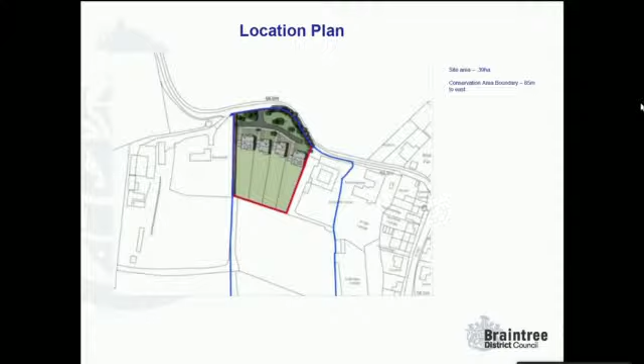This is a safeguarding map which shows the settlement boundary for Great Bardfield in the adopted local plan, and again in the Section 2 local plan, and you will see that the site is unallocated for development in either the adopted local plan or the Section 2 plan.

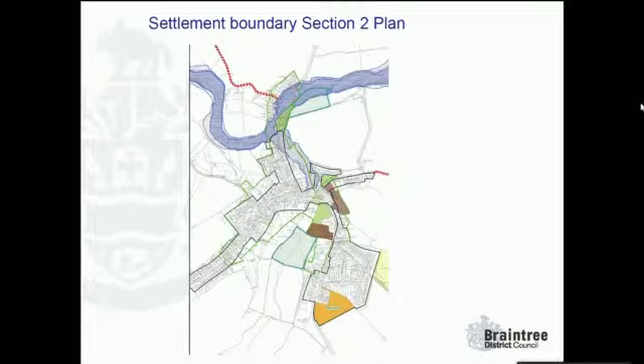This is a site plan showing that it's proposed to site approximately 4 large detached houses set back around 11 metres from the back of the highway, with the access approximately 21 metres to the east of Brooklands.

The dwellings would be set back about 11 to 16 metres from the highway, and the land is in an elevated position at least 1 metre above the extent of the highway. Also, as said by the parish council representative, there is a slope in the site from west to east, going down across the site.

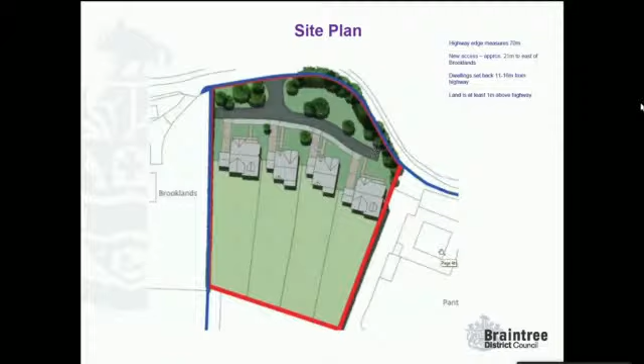These are illustrative house types giving an indication to us. Although these are not up for consideration, they show us that quite large detached two-storey houses are proposed in this location.

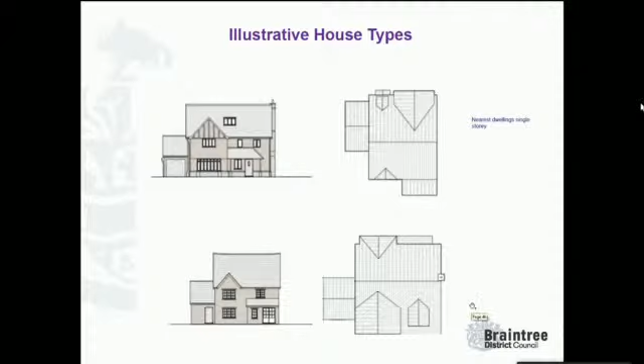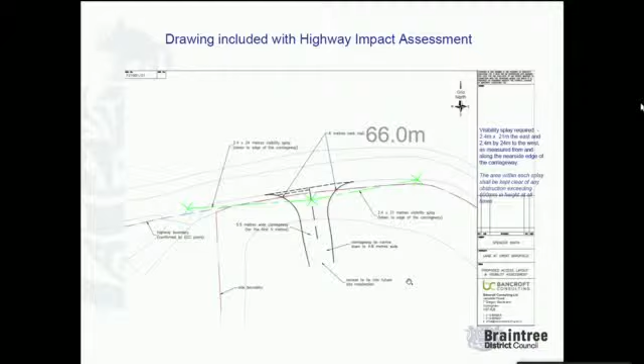This is a drawing that was included with the Highway Impact Assessment, which has been viewed by Essex County Council Highways, and no objection has been raised to the proposal in terms of highway safety.

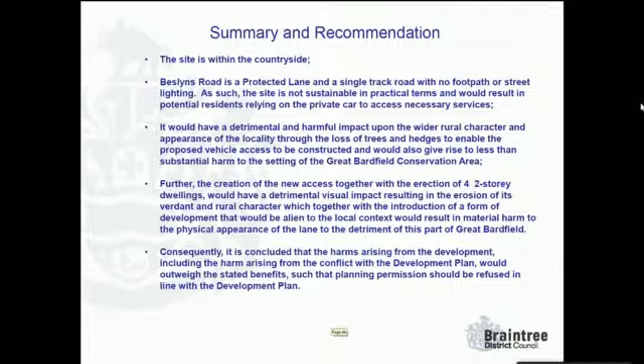Thank you, Madam Chairman. It's very difficult not to agree with both the Parish Council's views and the officers' views in the report and stated this evening. I think they, between them, covered it extremely well.

I mean, the main points for me: unallocated site, not in the local plan, not in the emerging local plan, beyond development boundaries and therefore in the countryside where countryside policies apply. You picked up the unsustainable location, dependence on the private motor car, travel by car, out of character with the existing dwellings in this part of Beslyns Road.

I can't, for the life of me, see how the County Council has missed the fact that it's a protected lane and has nothing of significance to say about the proposal's impact on that. I thought that might have been a starting point, and they also seem fairly blasé about the impact of achieving the access and sight splays on the actual rurality and appearance of the lane itself.

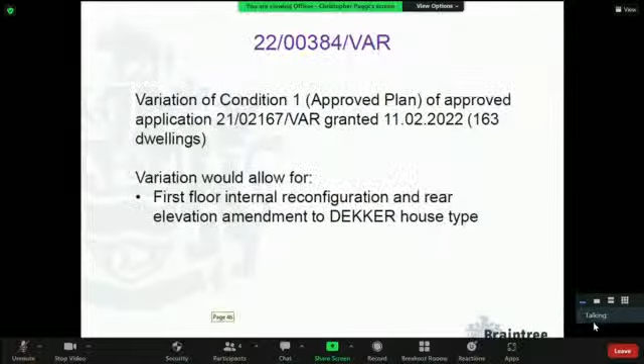So the application before you is a Section 73 application to vary the previous planning permission, and what we're looking at here is changes to the approved plans. So, as referenced by Councillor Thorogood within his statement, it relates to, first of all, internal reconfiguration of a particular house type, which is the DEKKER house type, and amendments to the rear elevations of those relevant plots.

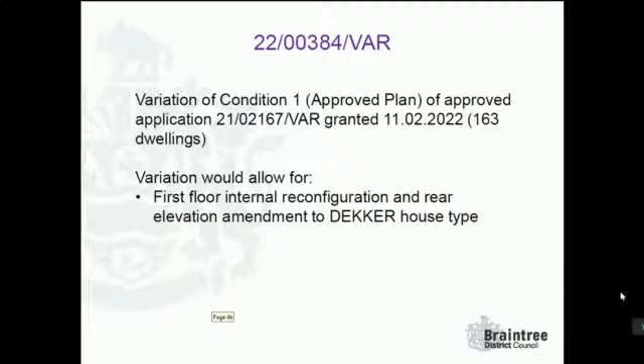So I'll just take you through the plans to start with. Apologies, my computer's now just frozen. I think I may have lost connection. Bear with me. Am I? Wait, I'll share your screen again. There we go. Okay, right, I'll try that again.

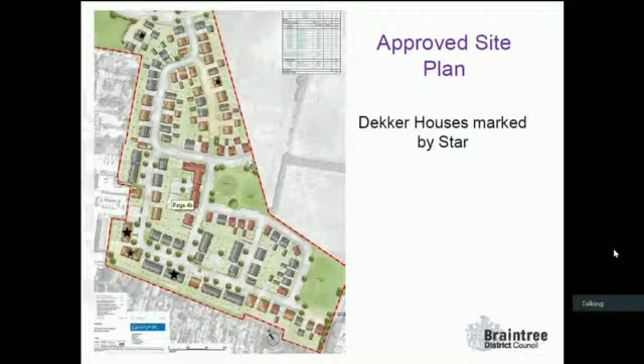So to start off with, the approved site plan is before you. As mentioned, the changes relate to 5 particular blocks of housing which are indicated by the stars on the approved site plan there. So it's 10 houses in total, and it's specifically the DEKKER house type. You can see 2 of those in the northern part of the site, and then you've got the 3 in the corner.

So just taking you through the previously approved plans. The elevation and floor plans on screen are the ones which were approved previously as part of the Reserved Matters application. The key thing to note is on the rear elevation plan you can see the central bedroom window, and on the floor plan you can see the bedroom arrangement with that central window. Within bedroom 2, located towards the front of the property, there was a cupboard in this location, and it was indicated to be a single room.

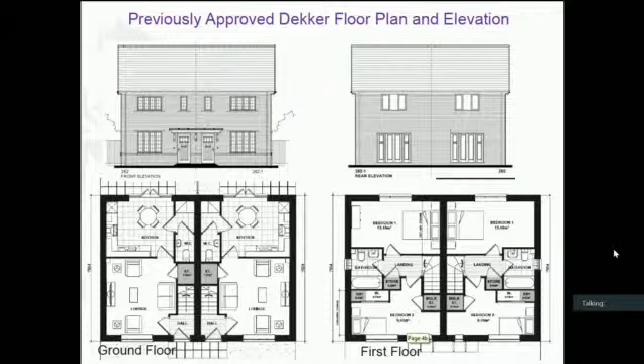So the changes which are proposed, you'll be able to see again on the elevation and floor plan. Starting with the rear elevation, you can see the introduction of a new single light window here for the ensuite bathroom, and you can see the bedroom window has been relocated on the elevation slightly, moved over to accommodate the position of the ensuite. On the floor plan, you can see the bedrooms to the rear, the arrangement of the ensuite bathroom in an L shape, and at the front of the bedroom you can see it's been changed from a single bedroom to a double bedroom. I'll come back to that point in a second.

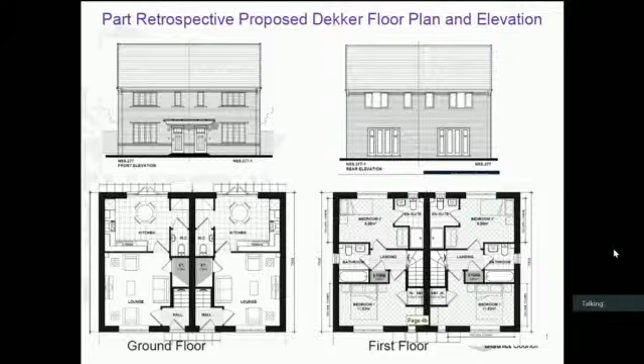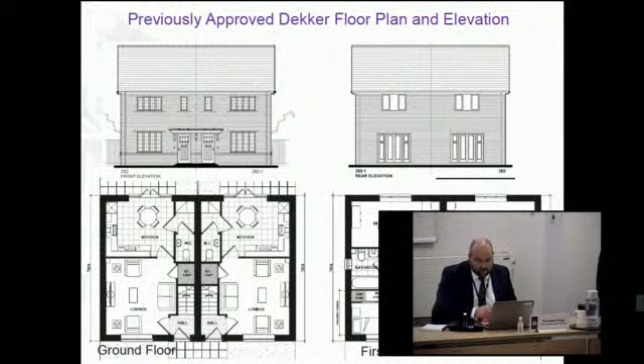But going back to the elevation plan, maybe it'd be helpful if I just flick back to the original plan - there you go. You can see on the rear elevation, the central location of the window and the introduction. I would really struggle to say in planning terms that the position is such that it would give rise to such a level of overlooking that we would need that additional control. You would imagine as well that the window, from the residents' perspective, would be closed the majority of the time, and being an ensuite, it's not a habitable room. So if it was a study or a different type of internal room, I think it would be easier to argue.

But it's obviously within members' decision as to whether or not you wanted to amend that condition or add a further condition to that effect. Hopefully those comments are helpful, Madam Chairman.

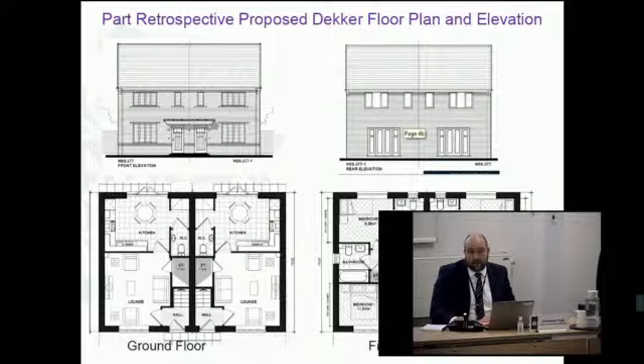How would we stand if these properties have already been sold? I mean, surely that becomes a legal battle between the developer and the new owners. They want to go in and do something that we've said they've got to do.

So strictly speaking, if members were minded to impose the condition, then the developer would need to speak and get agreement from the residents. Ultimately, effectively, if we were to put on such a condition, if that condition was not complied with, we should then be following it through with enforcement.

And again, the enforcement in those cases would not be against the developer, because the land ownership would then change to the individual homeowners. But again, in terms of the expediency of enforcement, in this particular case, it still comes back to the planning justification for why that is required in planning terms.

And again, it comes down to a judgment on the impact in terms of overlooking and on neighbouring residential amenity. And I think that's where I would struggle from an expediency perspective if we were faced with an enforcement situation, as to whether in this particular case that level of harm is such that it would warrant enforcement action.

Councillor Abbott. Thank you, Madam Chairman. Following up the point made about checking on developers, I believe as part of the enforcement review we agreed to have a compliance officer. I presume we haven't got one yet. No, but just to reassure members, that was the intention.